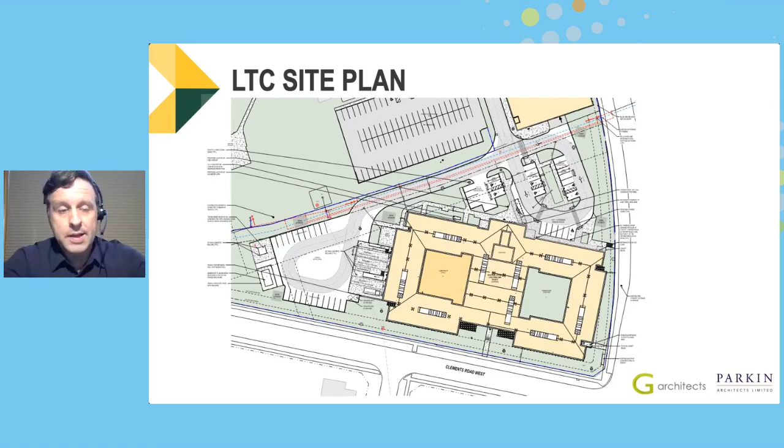Another thing to point out on the site, right near the front entrance, there are a few additional spots dedicated for a dialysis clinic that will serve patients from the community, as well as ambulatory residents in the long-term care home. I'll explain more about the dialysis when we start looking at the plans.

This is just to give an overview of the size of the building. It's a 6-story building, or will be when complete. The top 5 floors are almost identical, with levels 2 through 6 each having 64 long-term care residence rooms. That's 64 times 5, giving us our 320 long-term care residents.

The only real difference between level 2 and the upper levels is that there's a roof terrace on level 2 in the form of an enclosed courtyard. That's going to be a secure outdoor space for a specialized behavioral unit, which will be on the 2nd floor west side of the building. Otherwise, the floors are essentially the same all the way up, with the exception of that roof terrace.

On the ground floor, there's another enclosed courtyard. As you saw on the site plan, there's not a lot of real estate left on the site after we put our long-term care building on it, so we made this effort to create courtyard-type spaces for secure, landscaped outdoor space for the residents.

On the ground floor, as I mentioned, there are no long-term care bedrooms. The ground floor contains all the spaces the home needs to care for all of the residents - back of house and facility management, administrative type spaces, residence amenities, and that 9-station dialysis unit that I mentioned.

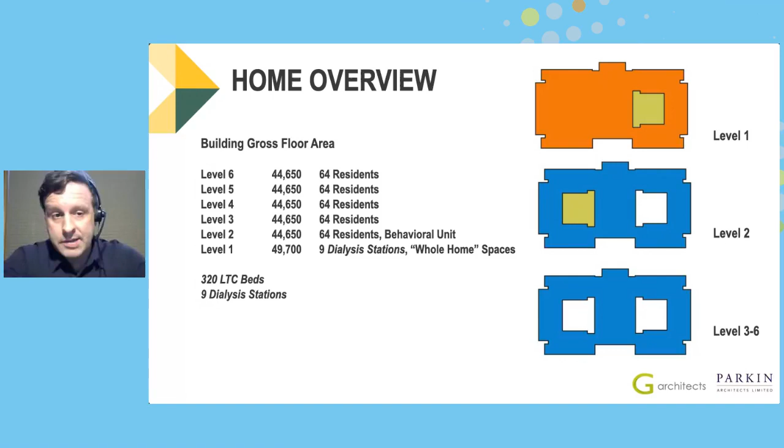This is a blocking diagram of what's on the ground floor. I won't go into great detail, but the colors represent different departments or types of spaces in the home. Gray represents facility management spaces, like the boiler room and garbage room. Pink and green are the laundry and kitchen facilities. Orange are staff facilities - break rooms, locker rooms, and similar spaces. Purple is the dialysis clinic.

You can see the dialysis clinic is connected to the main entrance area and has its own front door. Blue represents the administrative areas, and yellow is the residence realm - the public realm where residents will have access. I'm going to zoom in on that and speak a bit more about what kind of spaces are in the home for resident amenity.

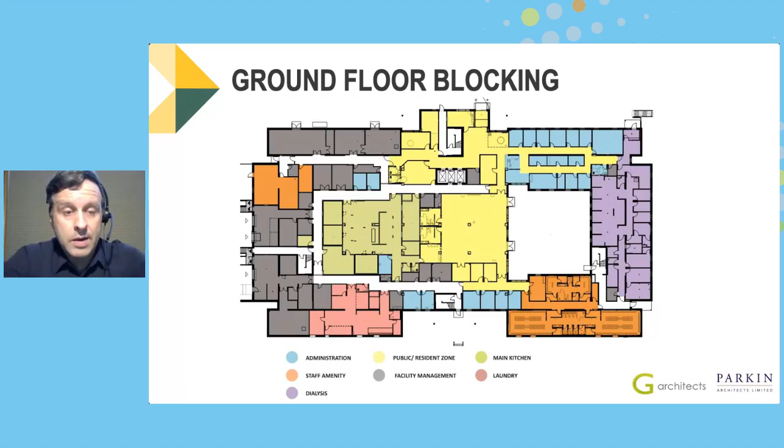This is one of the first diagrams that's going to start to unpack some of these ideas we have around infection prevention and control, best practices, and lessons learned from the pandemic. One of the strongest things we've done in terms of the ground floor is a really clear separation of both the front of house and back of house spaces, and a clear separation of traffic, service traffic, of both clean and soiled service.

So the yellow color is the resident world. That's the space that residents and members of the public, once they're appropriately through the door security of the front door, will all have access to. The gray color highlights the staff-only service traffic that also exists. So there's really two worlds on this ground floor plan: the front of house facing residents, and the back of house that is entirely staff-only.

Within that staff-only circulation, we've got completely separate traffic routes for both clean and soiled flows. For example, clean supplies come into the building through a separate entrance, things like food and medical supplies, going down a dedicated clean corridor to a clean elevator and up to the floors. Meanwhile, soiled things, particularly heavily soiled items like garbage and soiled laundry, come down chutes into soiled handling processing areas, proceed down soiled-only corridors to the laundry or waste handling areas, avoiding any risk of overlap between soiled things and clean things like food or fresh supplies.

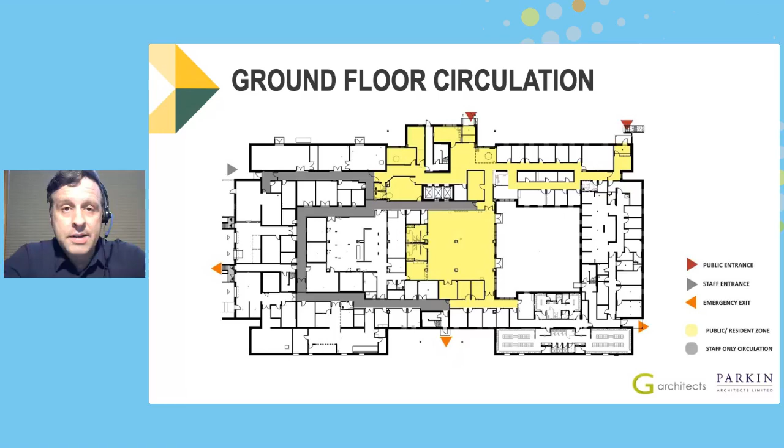That's one of the things we've really tried to implement in terms of infection prevention and control best practice. This is certainly an enhancement against, say, the baseline design of a long-term care home. Next slide.

So this is the public or resident realm of the home. We've zoomed in a bit on the yellow tone we've looked at a couple of times, and there are labels to help understand the types of spaces. This public realm on the ground floor really embodies the philosophy of the home, which is that it's a home to 320 people. And there aren't many spaces in your own home that you aren't allowed to go to.

The only spaces kept separate from resident access are those for their own safety, like staff areas, or for avoiding crossover and cross-contamination, as with the clean and soiled separation. Within that public realm, or front of house, the residents have very good access, which will hopefully promote activation, socialization, and positive outcomes for residents who come down from the floors to enjoy this generous, rich environment on the ground floor.

This is a slide I wish I had the power to gesture to during this talk, but I'll do my best to orient everyone to some of the spaces. The main entrance is right underneath the word 'resident' on this slide, under the public resident realm title. That's the main entrance, where we come into a generous area we call the gathering lounge.

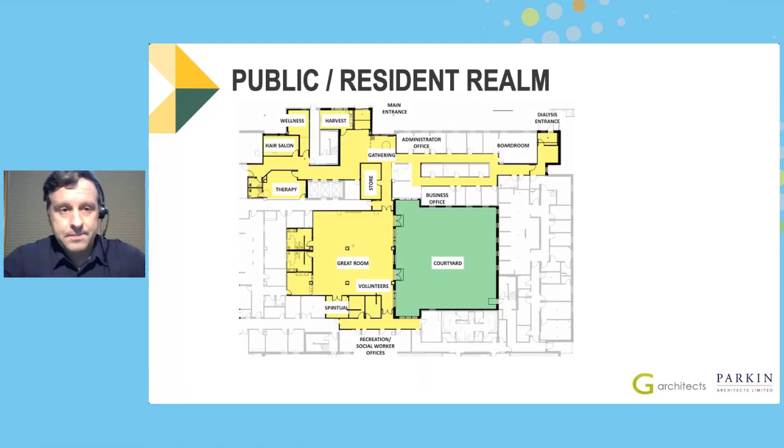The next slide, please.

This is a diagram of the typical home areas, which are the floors level 2 through 6, as I mentioned. They're all essentially the same, except that level 2 is the unit that will have the behavioral unit and will have access to a roof terrace, much like the courtyard on the ground level. It also has all those features of a courtyard I just mentioned - the microclimate and the security - but it has the added benefit that the behavioral unit will be able to conduct outdoor programming in a completely safe, secure, and separate environment from the rest of the residents.

So that's a really positive amenity for a behavioral care unit to have access to. But other than that second floor roof terrace access, all the home areas on the floors are essentially the same. There's one resident home area on one side. A resident home area is a Ministry of Long-Term Care defined term - sometimes they're called neighborhoods or households - but the 32-bed home area is meant to really be the home for those 32 residents.

The trends in long-term care with considerations of resident acuity, cognitive ability, and mobility challenges mean that a lot of a resident's daily life is spent in their home area, their unit, since traveling long distances can be challenging. So we try to make the home area have all the things a resident needs for day-to-day life. That means every home area, every grouping of 32 bedrooms, has its own dining spaces, living rooms, lounges, activity spaces, as well as all the spaces staff need to care for residents, like a nurse's station, assisted bathing spaces, medication rooms, and supply rooms for supplies and personal protective equipment.

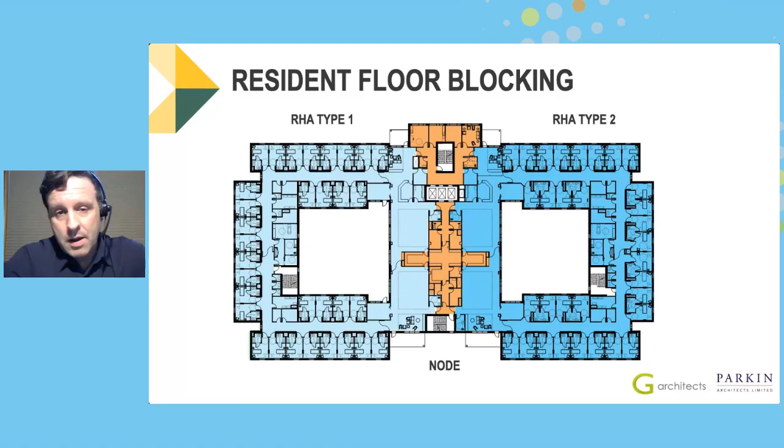One of the great design enhancements, or post-pandemic thinking, in this project is in the bedroom design. This building has a much higher than average ratio of all private bedrooms versus two-person bedrooms—75% of all the bedrooms in this building are completely private, meaning a bedroom area and a two-piece bathroom associated just with that bedroom. Some long-term care homes have 60% or even 50% of rooms private, with the rest being two-person rooms. We've seen a lot of evidence that private rooms have superior performance in outbreak conditions, so having 75% private rooms is a substantial measure to improve this building's performance in a future pandemic or outbreak.

As for the 25% of rooms that are two-person rooms—generally provided for reasons of affordability—in this design they aren't truly two-person rooms, but what we'd call semi-private rooms. Each bedroom is essentially private; you have your own door into your bedroom area, but the semi-private bedrooms, colored light blue in this diagram, have bathrooms with two doors into them, sort of like a university dormitory arrangement. The sleeping room itself is completely private and separate.

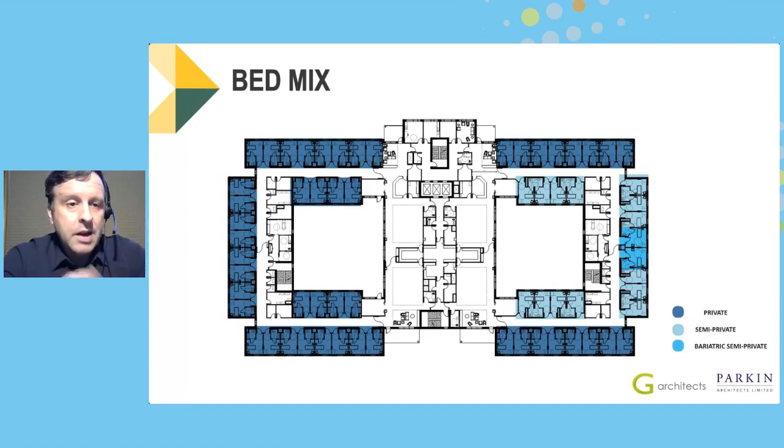Another unique feature of this home that not many long-term care homes in Ontario have is dedicated rooms for bariatric residents—bariatric being the clinical term for very large people. There are two bariatric suites per floor, shown in the royal blue, medium blue tone in the diagram. Those have several features to accommodate larger people, including more space in the room for maneuvering very large mobility devices, and things like ceiling lifts, grab bars, and other fixtures rated to support greater weight.

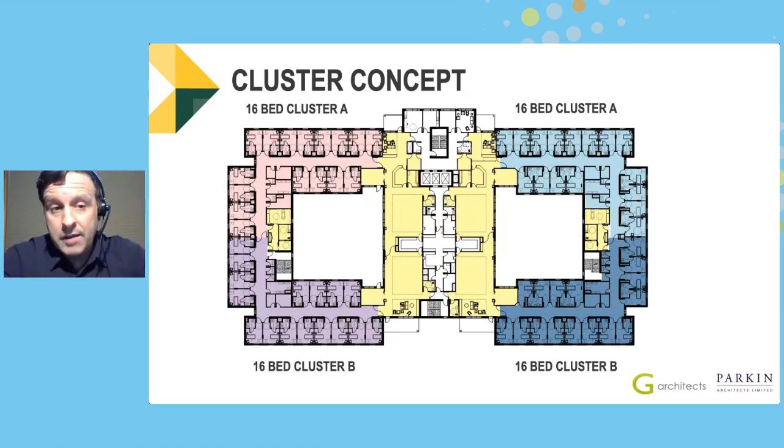So I want to review some of the long-term care design principles in this plan. I've talked a lot about infection prevention and control, which is very front of mind for everyone these days during the pandemic and looking to the future. But I've also mentioned how some of the design measures are specifically about that, while also doing double duty, thinking about things like smaller, more residential-scaled and familiar spaces, improving residents' sleep, and generally positive outcomes.

That's really the core of it: resident-centered design. That's a personal passion of mine, and something we've managed to work hard to implement even within this very fast-paced project. Resident-centered design means being focused on evidence and outcome-based thinking—looking at studies about sleep patterns and how resident sleep impacts overall wellness and improves outcomes. That's the kind of research that goes into the design.

Resident-centered design also means being very staff supportive, because we know that staff morale, quality, and level of satisfaction in their work impacts the residents they care for. So we've made sure this space takes into consideration the challenges staff have to manage while working in a building like this. We're also sensitive to the fact that staff spend a lot of time inside this building, so we're considering their needs, with specific measures to support staff and keep them healthy and safe.

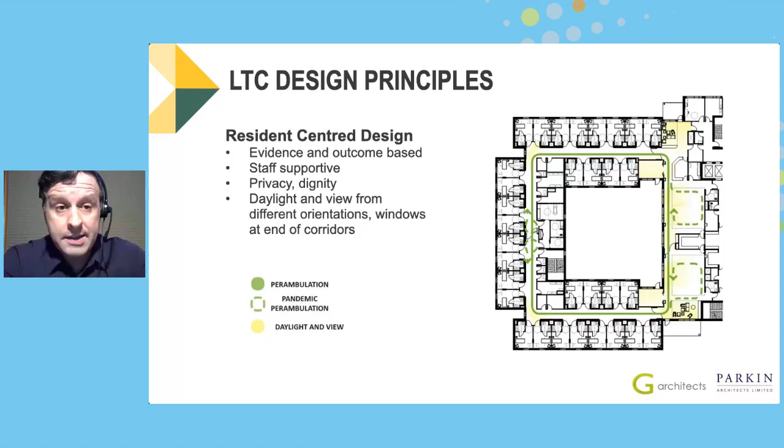I'm sure that was a lot to digest in just about 15 or 20 minutes, but I'll try to recap a little bit, specifically to highlight some of the specific design measures we've implemented into this project, in addition to working at an unprecedented pace.

Some of the key post-pandemic design enhancements: I mentioned the idea that the home areas are clustered, further subdividing the home areas, which creates both more intimate, home-like spaces, but also aids staff in future outbreak management. There's a very strong separation of clean and soiled service traffic, and design features to support staff and reduce transmission, like the locker room function.

We are exceeding the Ministry of Long-Term Care's minimum design standards for many space allocations. The spaces are larger than they need to be. For example, the resident bedrooms are about 10 or 15% larger than the ministry's minimum standard, and corridors are typically 7 feet at their narrowest, again exceeding the ministry's minimums.

We've also given thought to family visiting and family caregiver access during a pandemic, how that process will work. There's also very generous ground floor resident common amenity spaces — the town hall, chapel space, ground floor resident courtyard, gift shop, and gathering lounge — all of which will create a social hub or heart for the entire 320-bed home.

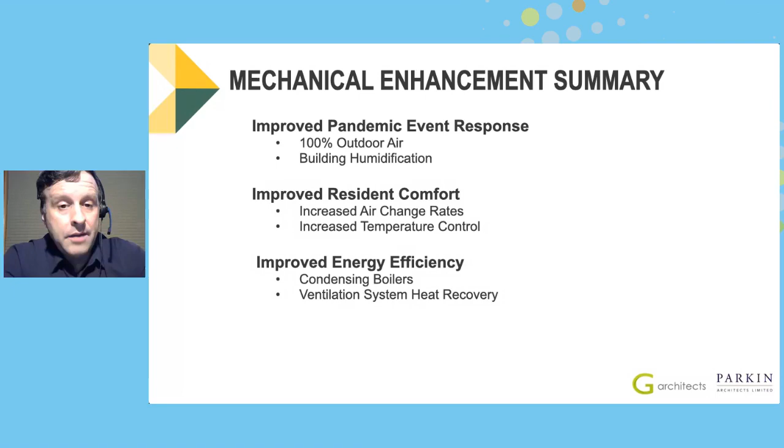Next slide, that might possibly be my last slide. Oh, of course, the outside views, good. We're just going to share a few views of the outside of the building to give you a sense of what it is going to look like.

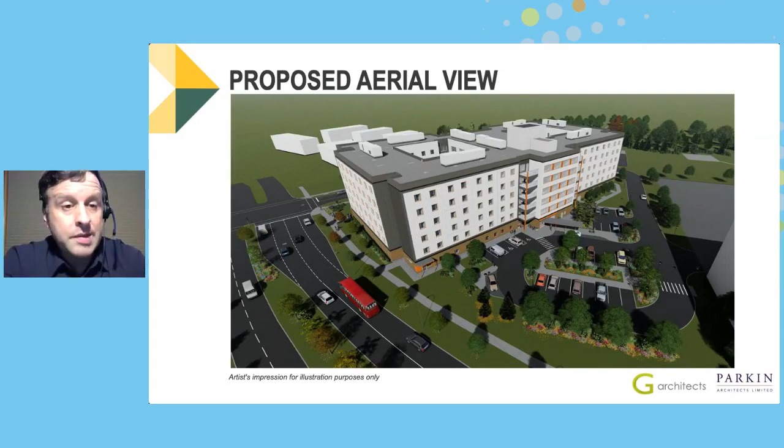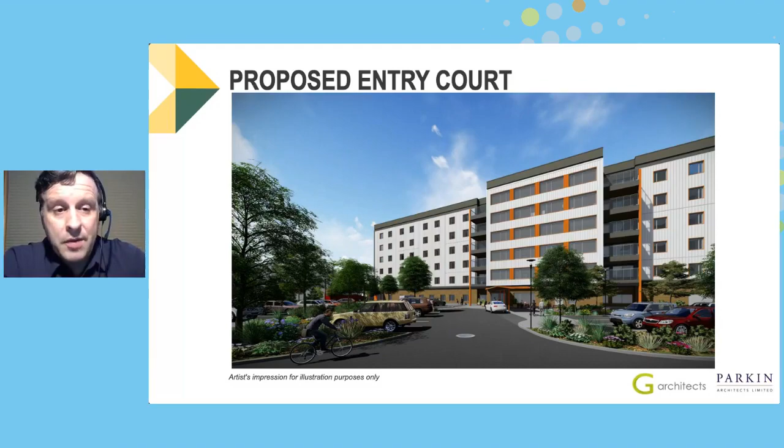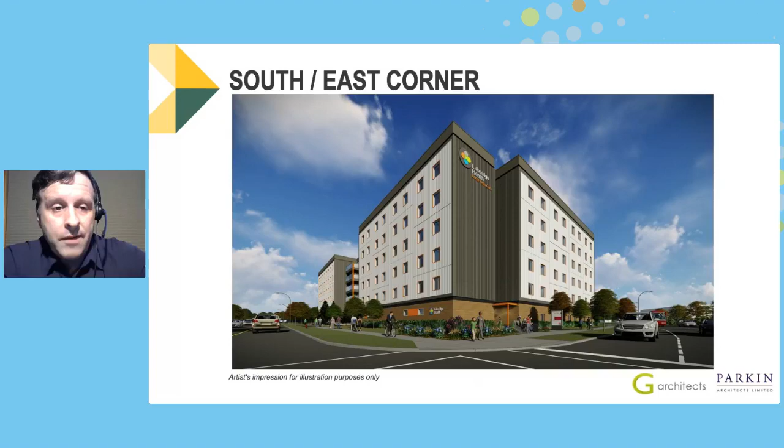A lot of the materials and the design of the building had to make sure it was always supporting the rapid construction goals, so everything is prefabricated in this project. This is what Andre is going to start getting into. We're working with standardized prefabricated wall panels and structure, and that is one of the reasons why we weren't able to use any brick or masonry. We had to use entirely materials that could be put up very quickly and rapidly and prefabricated, so a lot of the materials on the building are metal sidings.

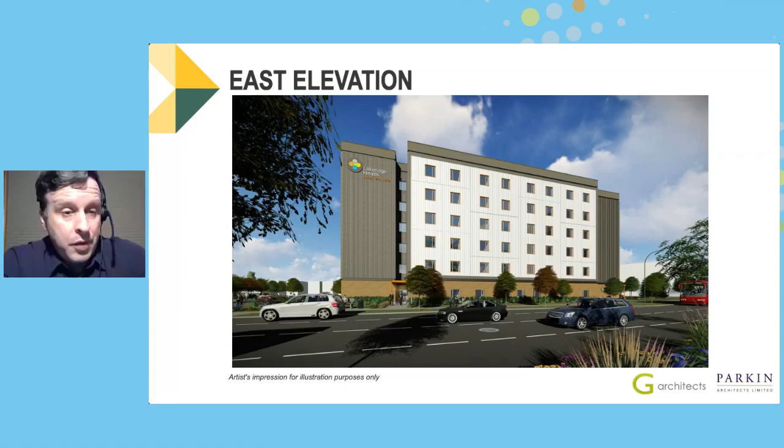Around the ground floor of the building we're using that kind of brownie color, a wood look material. So at the pedestrian realm, it's going to be very warm, very natural looking. While it's a metal product, which is great, non-combustible and very durable, it actually looks quite a lot like wood. It'll be very warm and friendly at that pedestrian scale.

Above the building, we've used lighter tones of metal siding with a kind of persimmon orange accent color for a bit of playfulness. The intent there, from a community perspective, is really to focus on that pedestrian realm, that first floor, with a warm palette and a texture that feels comfortable for pedestrians walking around. The lighter tones on the upper building make it feel a little less tall, a little less imposing, lighten it up, and help it blend in with the sky.

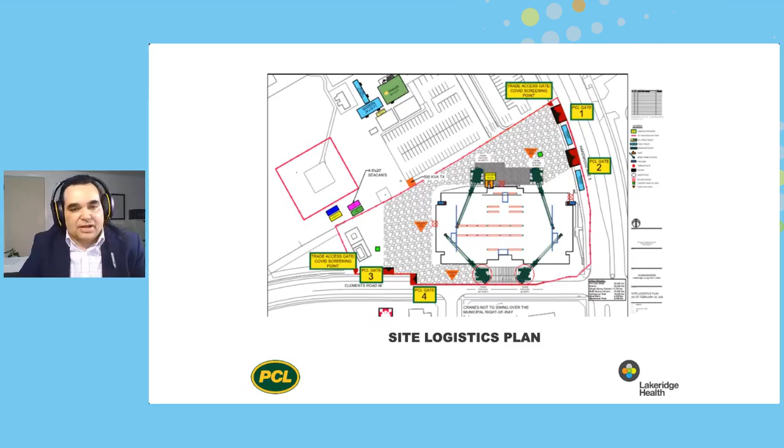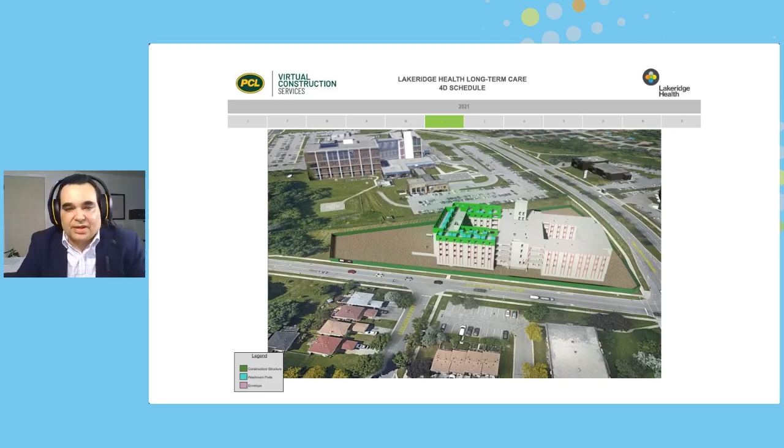Further wall panels and washroom pods as we continue up the building. This is happening really fast, almost on a weekly basis, you'll see this amount of activity.

We're almost near the top, and we're doing the last bit of precast on the core there. And we get into July, where we're topping off almost the second last floor with the precast.

And now we hit the roof. So sometime in July, I believe it's the mid part of July, we start the roof on the west side while we put up the last little bits of structural elements on the top floor.

We continue across, topping off and putting in the mechanical penthouse units and putting in the precast on the east side.

Through August, we continue with the mechanical units on the rooftop. And we've started the envelope, and this will go very rapidly, where we're kind of wrapping from the west side and going around the building and going up.

So there will be crews working pretty much all day. We start fairly early in the morning, I think it's 6, and we'll continue to just before midnight at this pace.

You can see how rapidly we go up the building on the west side, and on the east side we continue up. It's a little bit slower because the centerpiece needs a little bit more time.

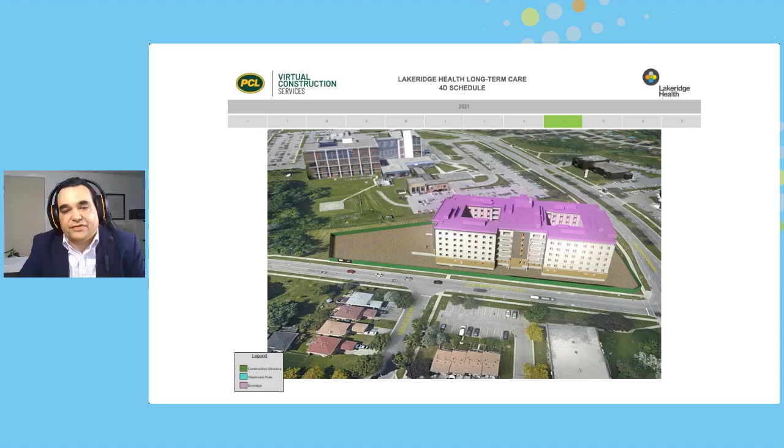That's where we start to do the final tie-ins to the roof, and we complete the roof.

At this point, I'm going to switch the conversation because there's landscaping and stuff like that, which will be happening in parallel. But here's a little indication.

Some of the modular elements that we're doing: precast hollow core slabs, precast cores for the stairs and elevators, washroom pods, that's down in the bottom left corner. You can see the washroom pod and how it would look like on the inside.

These things will come delivered wrapped, shrink wrapped, essentially like anybody out there that's into boating and you winterize your boat, it would look something like that.

Up on the top right is the wall panels, and that's giving an indication of how they're assembled, and then they're tilted up, and the final pieces of at least the underside of the envelope put in the AVB, and to a certain degree the clips and windows.

And then other notable elements down at the bottom in the center is mechanical risers. So in order to allow this building to proceed very rapidly, our M&E partners are assembling pre-racked or pre-riser elements such as HVAC units or electrical trays, which includes power distribution and comms.

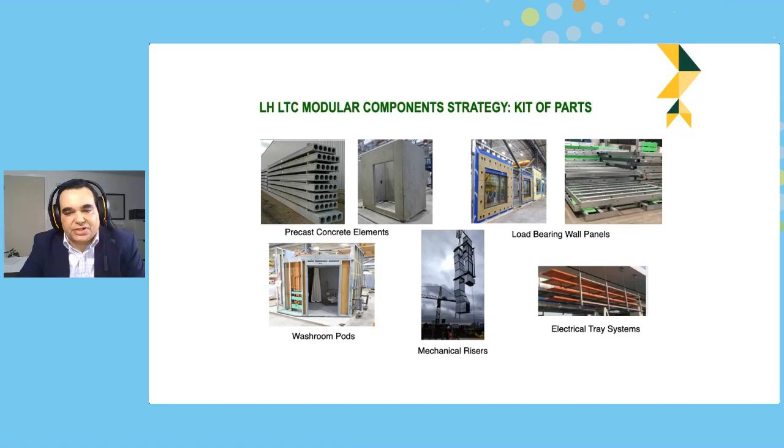Here's a quick run through of how a pod element might work.

This is pretty much the precast slab and how it would look like just before we raise a wall panel on it. There's a little hole in the middle there, and that's where the mechanical risers would go.

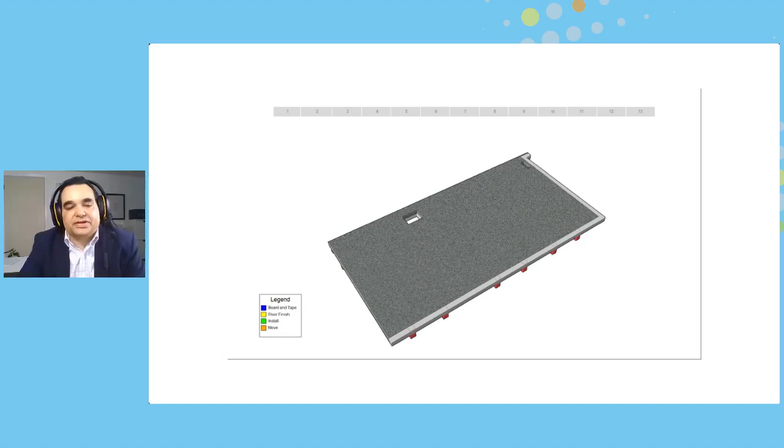These are the exterior wall panels. Those would be erected first.

Then we drop in the interior structural wall panels, and then we put in the tie beams that would put it together.

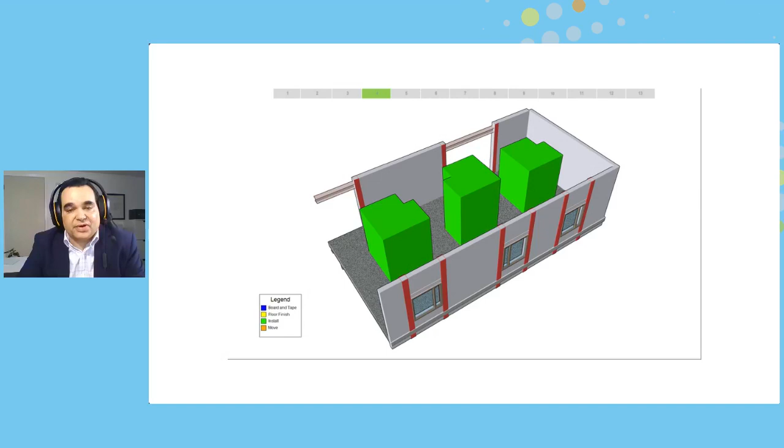Right after that, we drop in the washroom pods, not into its final place, but somewhere close inside the rooms. And then we cover it with the precast elements.

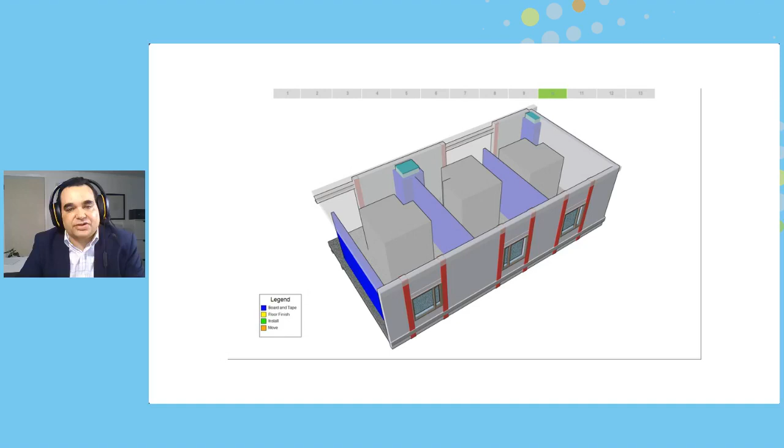The next slide will bring us back into the space and start to show what's going on. We'd introduce wall partitions, so you get a sense of where the room divides. Then the next slide shows us putting in the mechanical risers, then the wall partition around the risers. We complete the partitions, cladding them and getting them ready to accept the washroom pods. We set the washroom pod in its final location, and our skilled tradespeople will do the final connections and get those things tested and running beautifully. Then we come in and do a topping, which is how we get these floors perfectly flat.

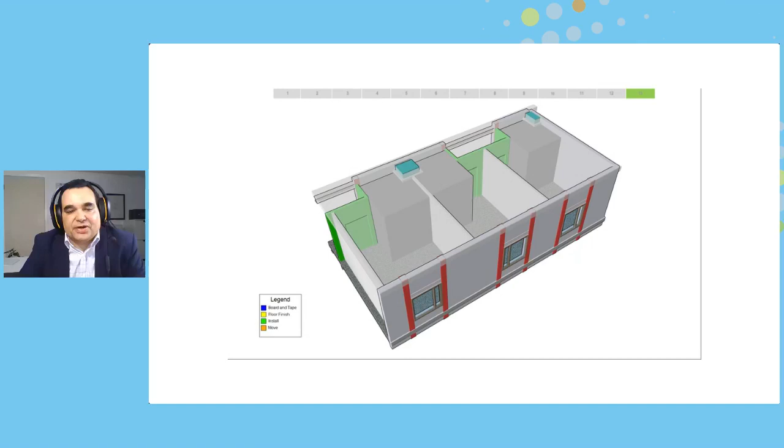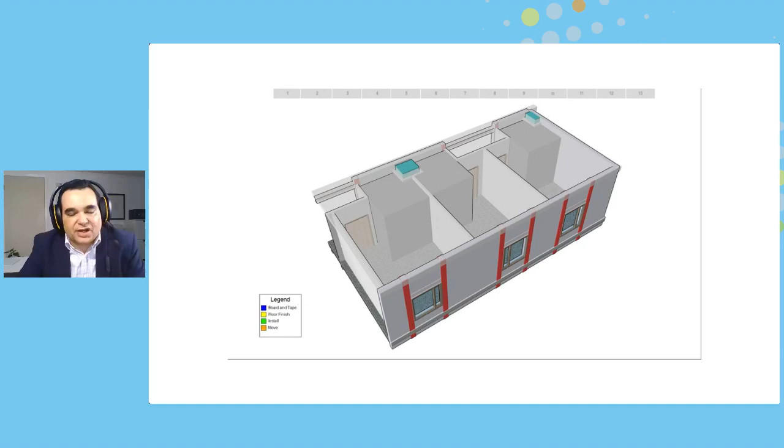We're going to flood the floors before we introduce the next element, the partition that includes the door. We're doing this to ensure we've got the best floor flatness we can achieve at all points throughout the building, so residents don't have to worry about slight slopes and challenging flooring. Then we finish the wall elements, and you can't see it because it's grayed out, but we insert the final doors after that topping's in place. Essentially we start the real finishing, the painting, the flooring, and that kind of stuff. So I hope you enjoyed that kind of slideshow.